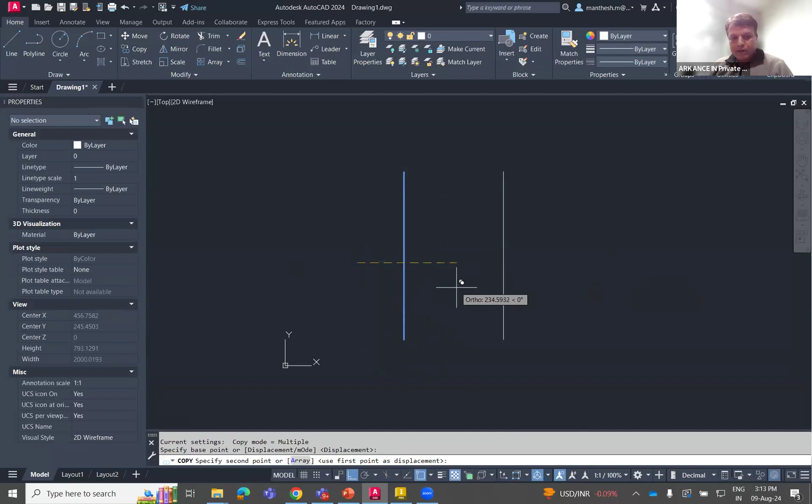I'm going to create some support type of structure. Let me say it as some 400 units. I'm going to copy the same thing for another 200 units. Let's say 150, it's enough.

Circle. And again, one more option. Say size 70. Similarly, I'm going to create a line for another 100 units, at 25 degrees. Similarly, I'm going to mirror it. So this is one of the product supports, whatever you can observe.

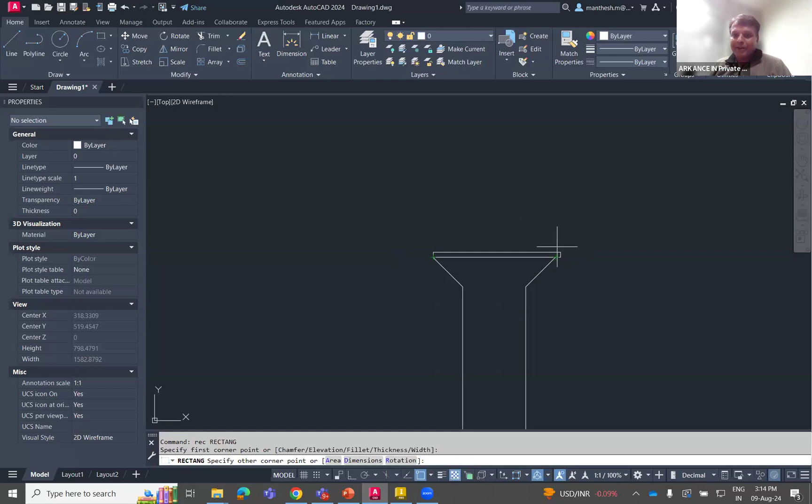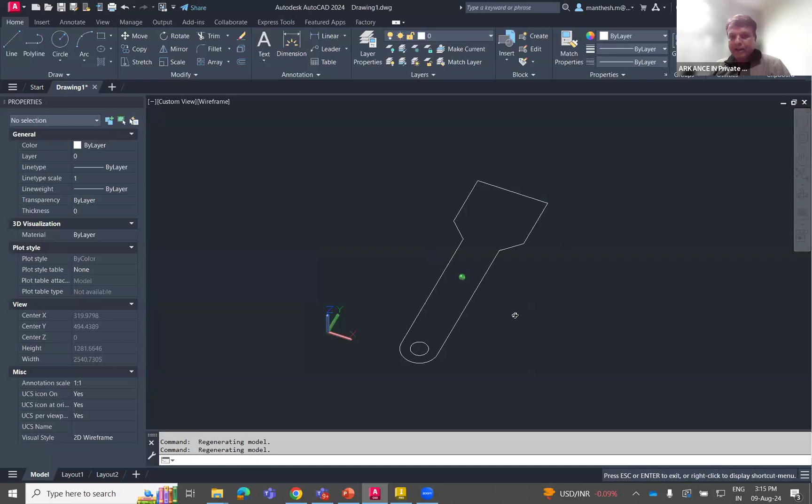I'm going to trim this. Now what happened, so this is actually the base part. Nothing is there in 3D, so I'm just giving a confirmation that we are working completely on the 2D thing. But...

Then again, I have some curved area here. Now this is like a front view. If I take the side view of this, let me create a side view of the component. Maybe I may have a few thicknesses, is it?

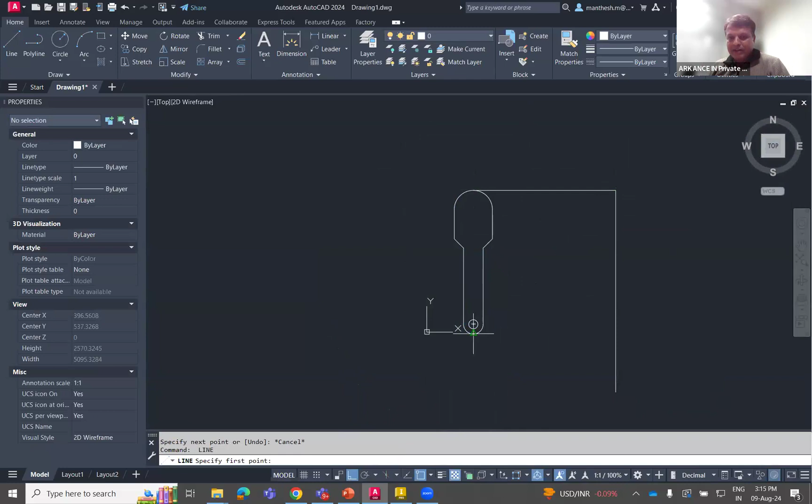Let us take it as thickness of 20 units. Frame. And in between, I have some space of about 150 units. And on top, this is getting interconnected.

So how is it going to interconnect? Probably through a product. You can consider it as some cylindrical type of object. It is getting connected, maybe about 60 units in diameter.

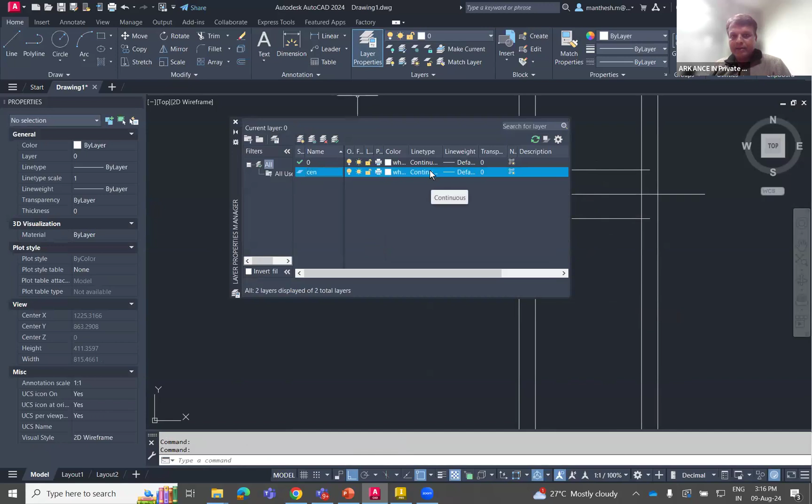And I am going to make this as some center line. Now we don't have layers, so I'm going to create a few layers here. Then set it as center line. Load, okay, some center, okay.

And I'm going to select this. I'm going to create only one layer for this, so I'm going to push this for my center line. And let the color be red. Right, no problem.

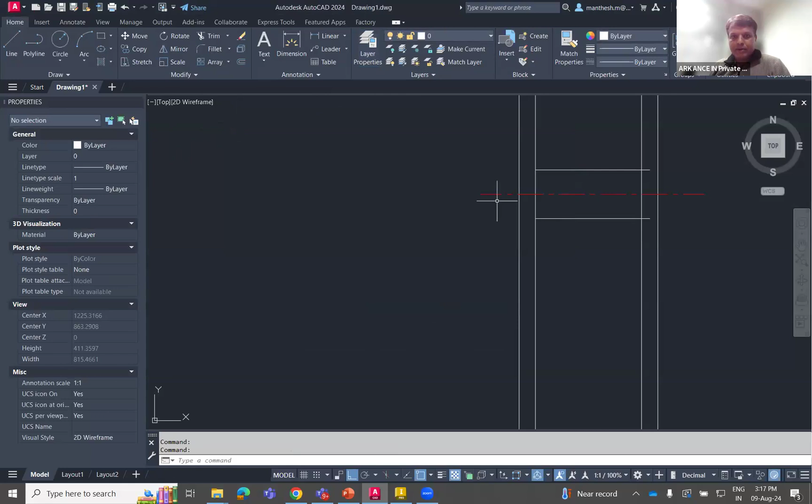But this particular object is in hidden line. Let me move this to one more layer. Let me create it.

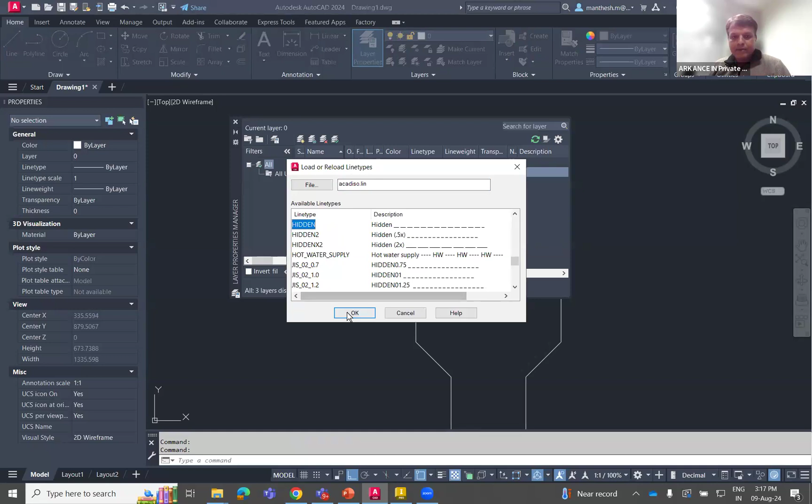If you are using AutoCAD Mechanical, probably you can use all this layering through the AutoCAD Mechanical setting. And let it be in the color yellow. So let me post this for my hidden layer.

Now, the thing is, I want to connect this 2D entity to 3D. I want to connect this 2D entity to 3D. How can we do that?

See, earlier we used to move this to origin. Let me move this to origin so that I want to make sure how a user coordinate system links from 2D to 3D, or from 3D to 3D files, whether it's a STEP, IGS file, whatever the data is flowing, only the origin, if it is a neutral file.

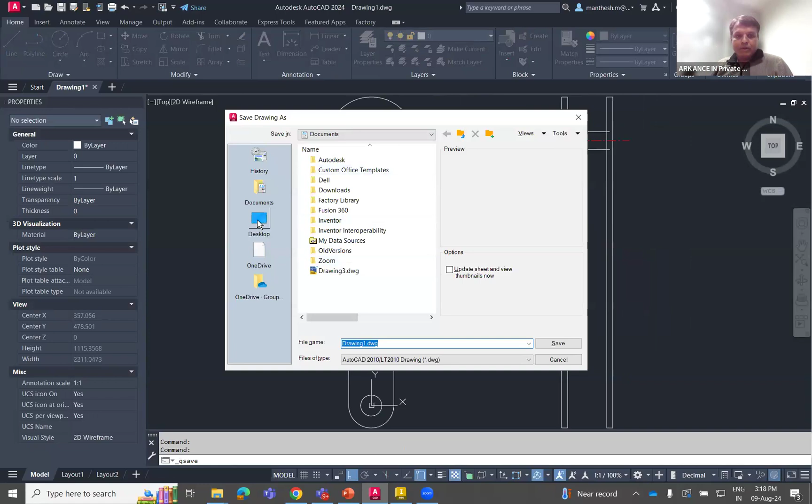I want to save this component. So intentionally, I created already a new folder. Nothing is there in the new folder. I'm going to save it as 2D drawing for 3D modeling. Save. Okay, now I have to convert this to a 3D model.

So let me go to Inventor. And as usual, last time I have not created a project. Probably if you're already using Autodesk Inventor, you'll be knowing how to create a new project. Let me create that new project.

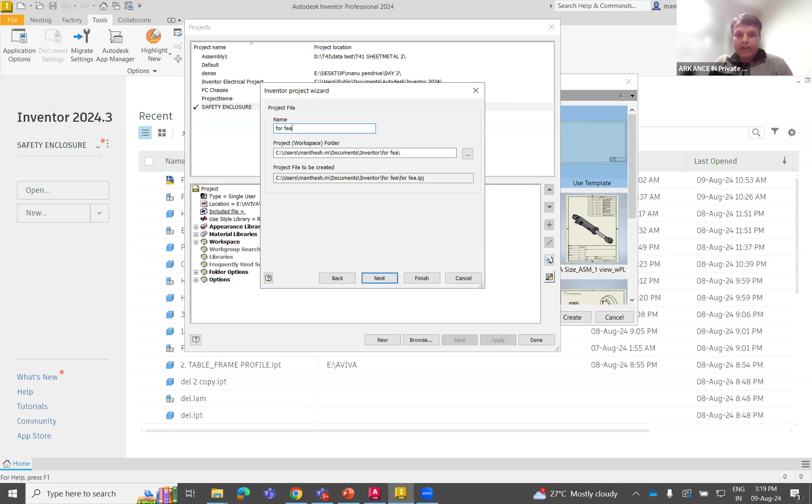Okay, bit off. This is one more challenge if you're using a high resolution system, automatically your screen or the pop-up menus will get enlarged. New single user project, I'm going to say it as FEA. And the project folder location, I'm going to browse the folder named delete. Finish. Done.

Metric, standard IPT. You can see this, I have files like side view and top view. Just going to save this, Control S. For reference now, let me have a few dimensions. So this is about 130.

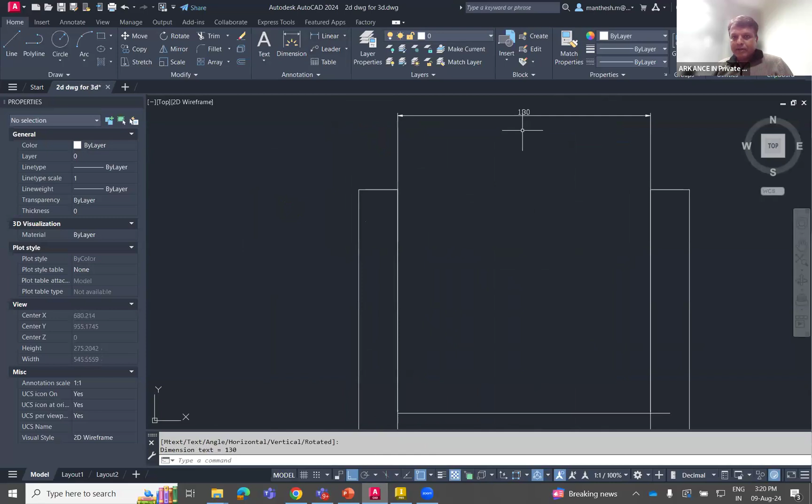Let me close this 2D file. I'm going to use the import command, directly linking through my project folder to the 2D drawing we created. I'll open it and place it on my XY plane.

I'm going to make the origin here. See, I'm selecting the origin here, but in the 2D file, the whole center was the origin. Now if I check my center points, both origins are located together.

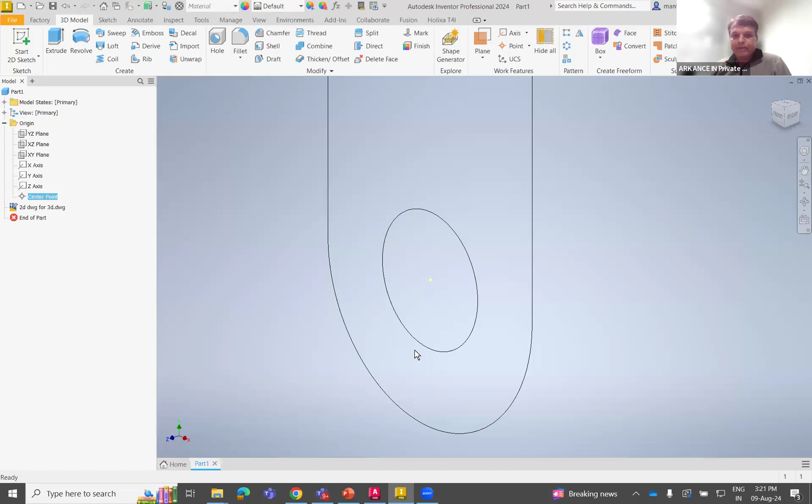So when importing the file, it allows the user to select the origin, because we work with 2D drawings where hidden lines, center lines, everything is visible. It doesn't ask while linking, like using DWG underlay through the import command, whether we can control the layer.

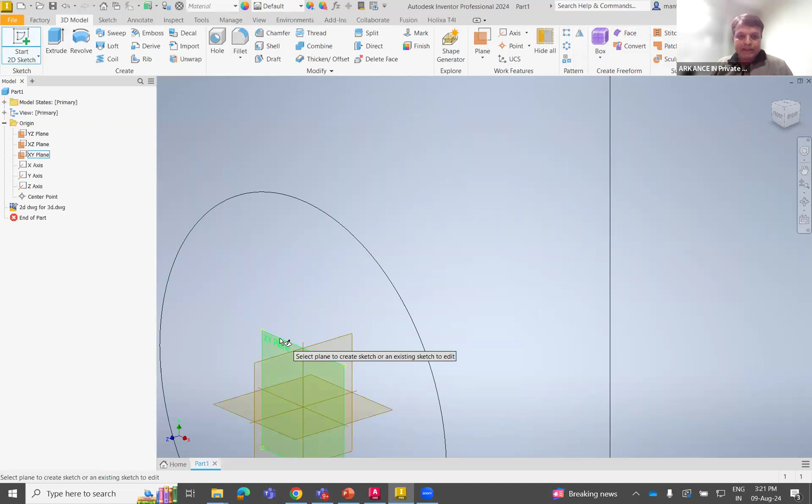Now what happens? Now I want to create it as a 3D model. So I'm going into the sketching environment again. The planes are very small in size, but you can resize them. I'm selecting the plane parallel to my front view, and I'm going to use project DWG geometry.

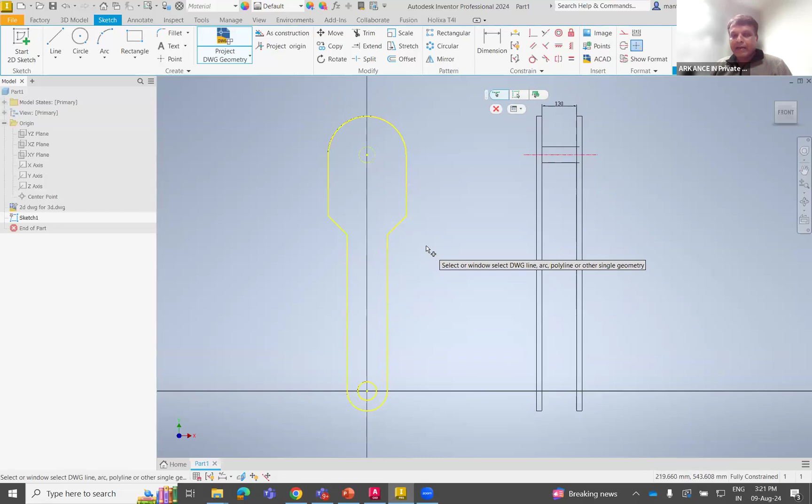Even if you want to avoid this, you can convert the objects. This is interconnection, so now I won't need this profile. Later I can add it, because even if I add this, I can mark it as visible or shared sketch and extrude it.

Let me expand this as well. Right click, finish sketch. I'm going to use the extrude command.

This is on the other part. Let me include it on the plate. Extrude, extrude. And the thickness - let me use measure to check it.

See, I'm not defining anything myself, I'm linking everything from my 2D file. I want the same thing with an offset of 130 mm. Not all CAD can be linked this way, but I can reduce about 40 to 50% of my drafting hours.

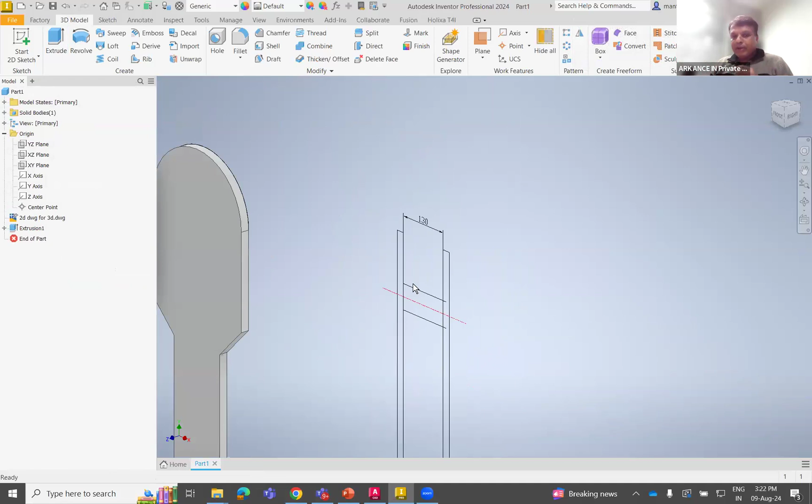Now it's about 130 mm. What is the best way of optimizing my job so that I don't have to recreate everything? 130, okay, I'm going to create a stud for 130. The sketch is there, extrude.

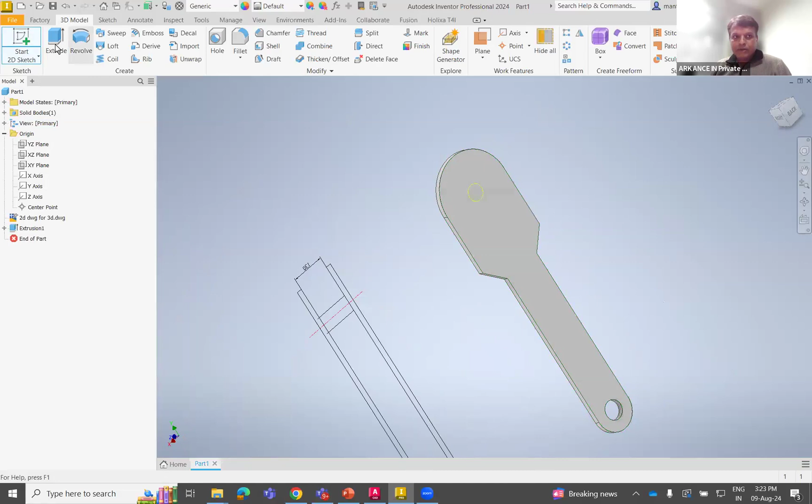It's now asking for the sketch. Start 2D sketch, select it, and I'm going to say project geometry for the same sketch, then finish.

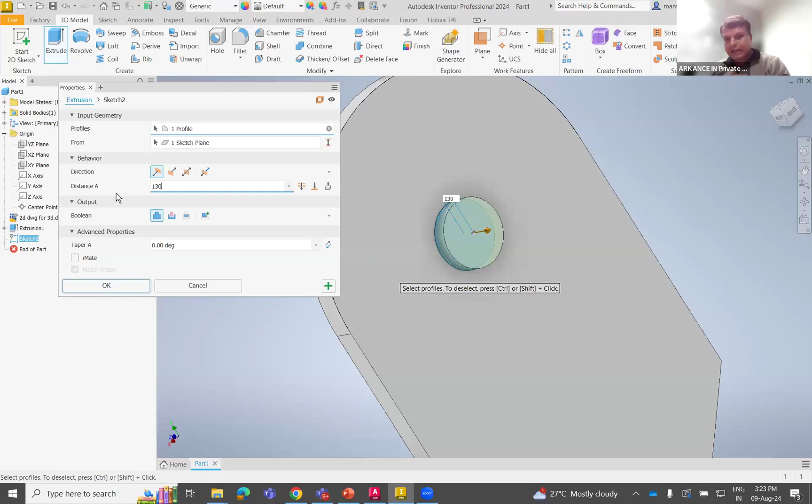So 130 is the unit. Either I can type it or take the reference - earlier we took a reference. Then I'm going with the plane option, mid between two faces.

Then I'm using the mirror command. In the pattern section, you can find the mirror feature - this is it. The mirror plane is the center one. Done, my components are ready now.

Now changes done in the 2D profile will affect my 3D model. Let me hide this work plane now.

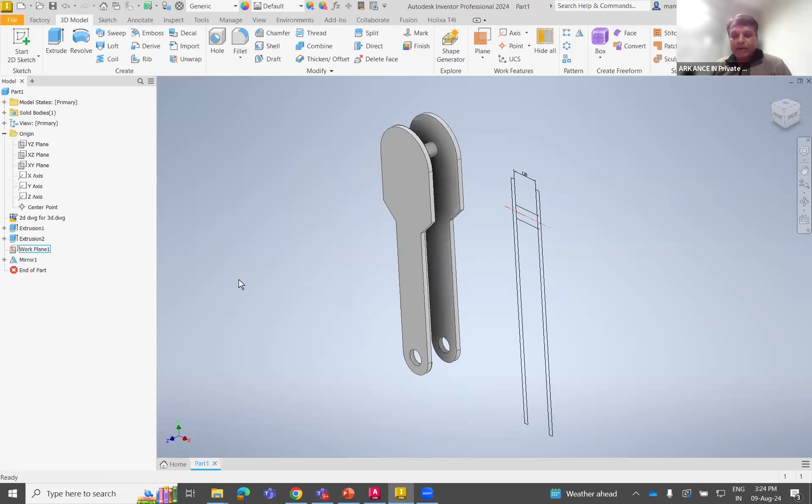Visibility unchecked. To do an FEA, we obviously need the material properties. I still haven't assigned the material properties. Let me take the material as mild steel.

Oh, I missed it. Mild steel - now we have assigned the material property. Let me save this part.

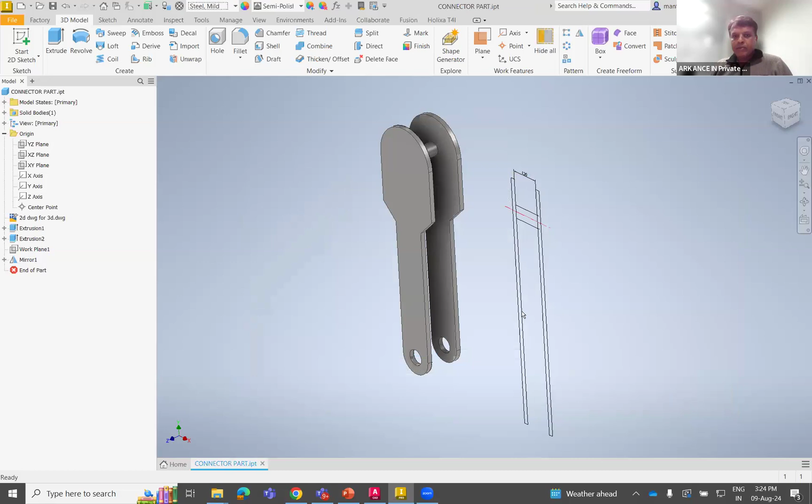I'm going to name it as connector part. Most of the time these things are in a bigger size, available in the railway engine. Sometimes it even looks like a small version of your vehicle chain, but I've taken it in a large format.

Now, changes done in AutoCAD - let me show you. Let us go to AutoCAD and do some changes now.

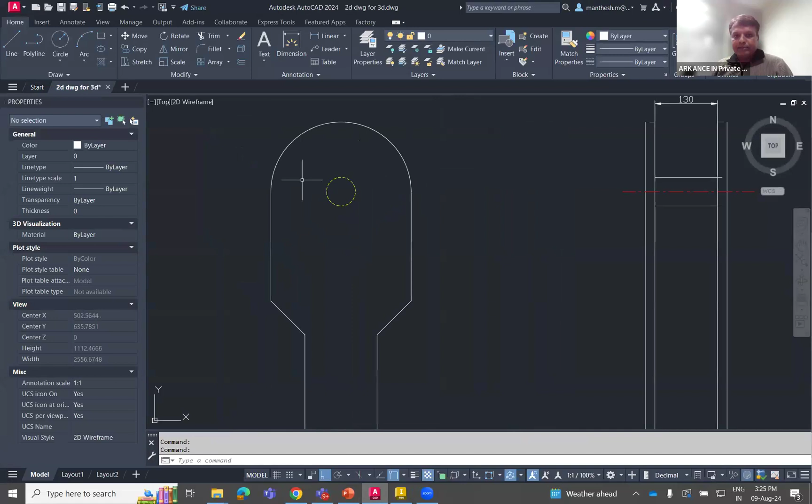I'm going to increase this. Right now the measurement is something like 60. If I change this to 80, I'm going to get it here.

And I'm going to use some fillet with 10 radius. F enter, R 10 is the radius. Already tested, very small in size.

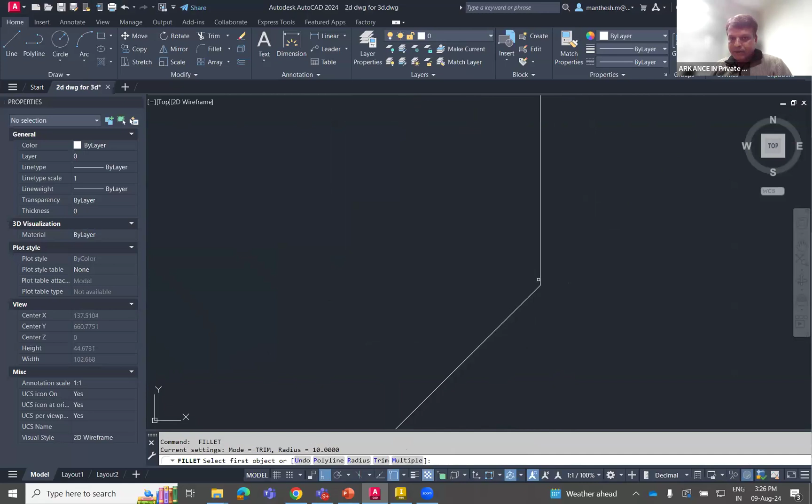Let us avoid the sharp corners so that we can get very good FEA results.

Now we have changed it to dia 80, or something like a cutout that you need to add - you can add it, whatever you save in AutoCAD. With Inventor now, it needs an update.

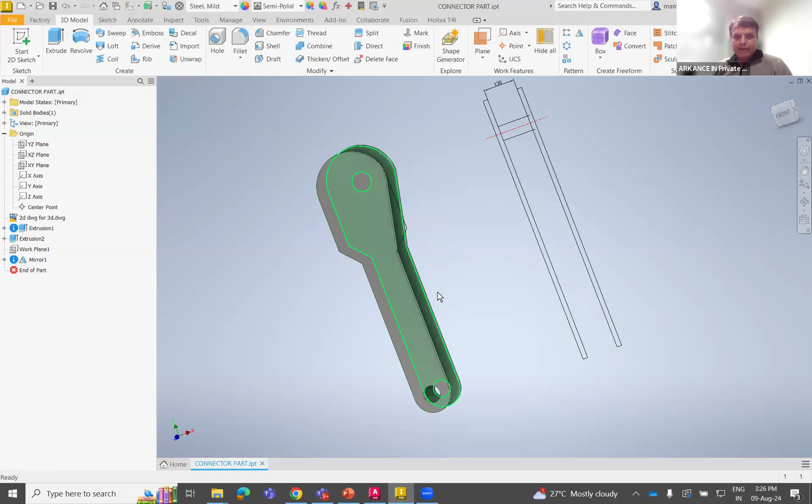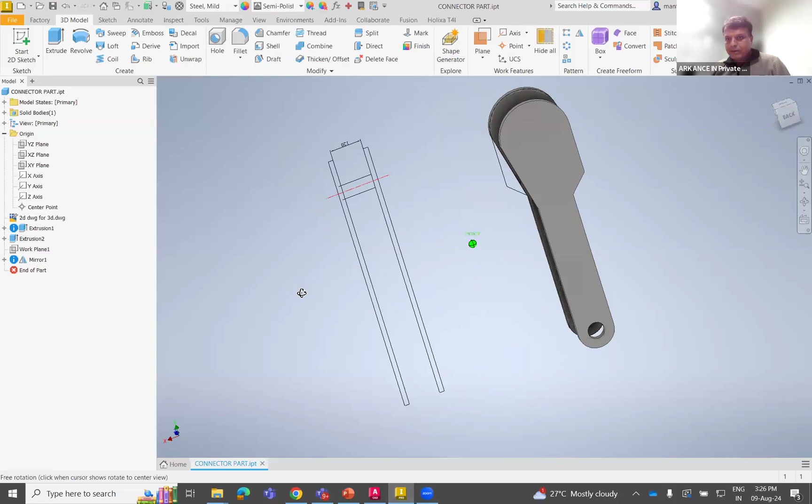Accept it - sorry, some problem. Let me close. It's showing as write protected because I launched in both software programs. I don't know what the problem was, let me recheck.

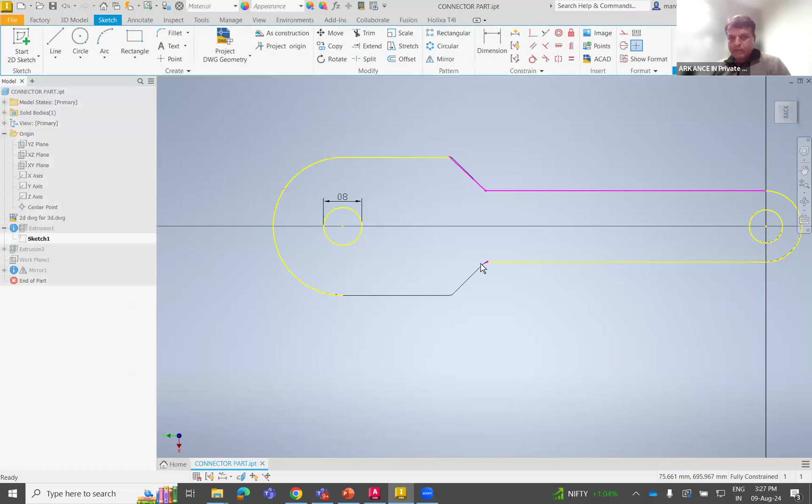Problem in the project geometry option. Project DWG geometry. Ensure that when you're projecting any object from AutoCAD, it has to be a polyline, or else you can use certain commands like boundary and pull the data. Finish.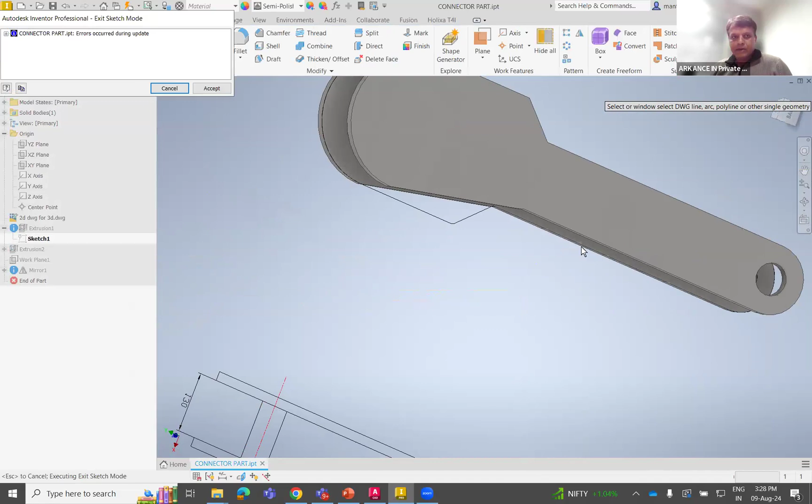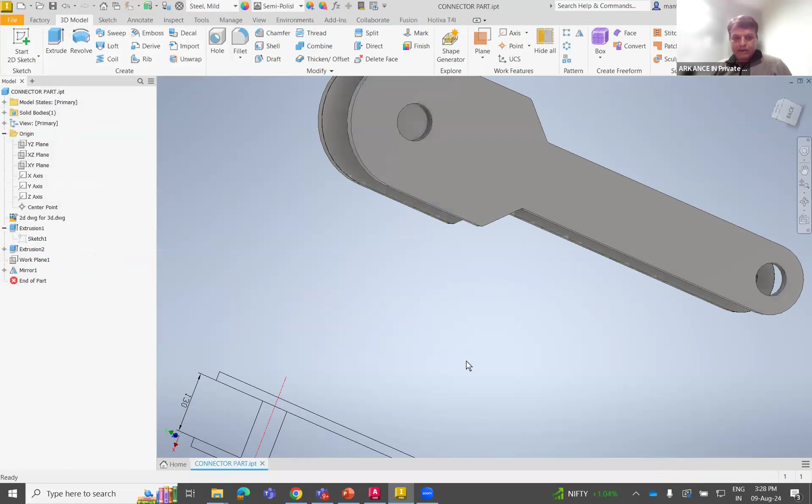Seriously, give me a minute. Let me cross verify this. Accept. Edit feature. Okay. Now everything is okay. Save it.

So my product is ready and it is communicating with the 2D. Whenever you cut some line and close a boundary, you make it an open boundary. But how to avoid this mistake is, this is like single entities, is it? You can use the polyline edit command, select multiple, join all of them, turn it into one. Now whenever it is a continuous line, you won't get an error anymore.

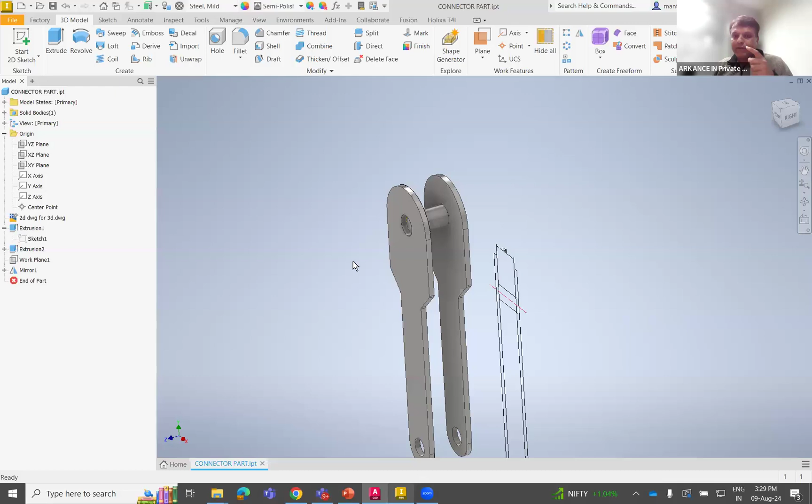Whenever you have an open loop, while using fillet and other things, it will become an open loop. Then the associativity will be lost because Inventor needs a closed profile to extrude. Am I clear?

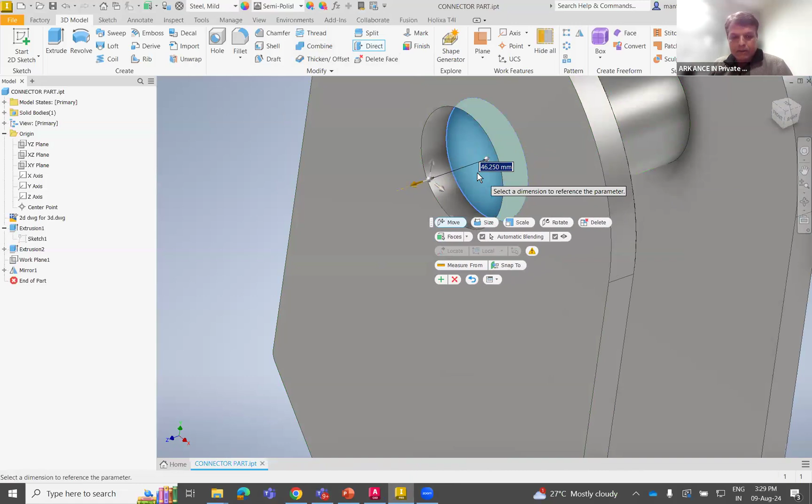Now, before getting into FEA, I have to close these gaps. I can use direct edit, 20, or else I can go to extrude. Again, I can maintain the associativity by saying project geometry, finish.

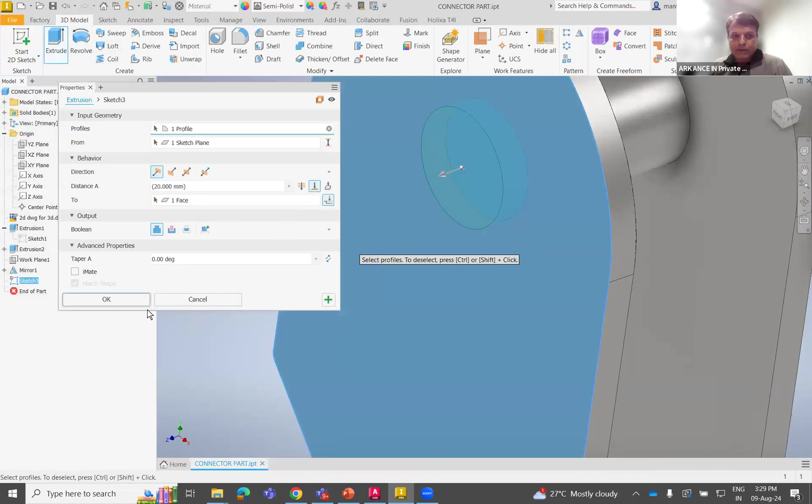To this face. Okay, same here. Extrude. Start 2D sketch, let's say, then project geometry. Finish. Extrude till this face.

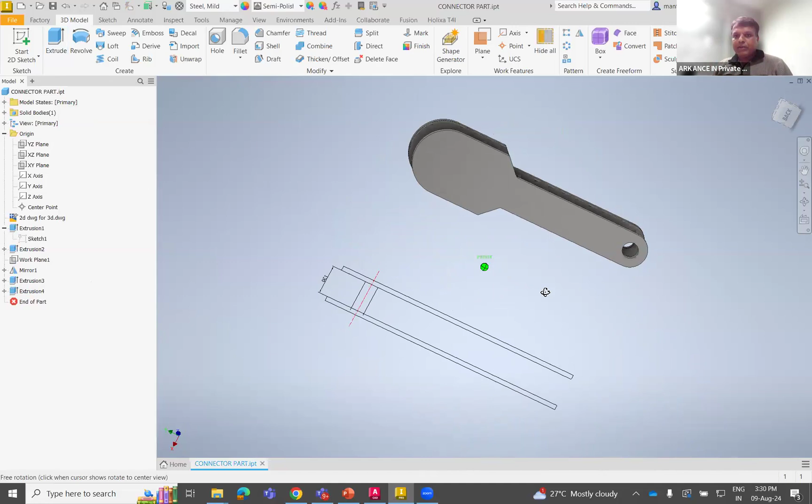Now what next? See, why do we do an FEA? To optimize our model, is it? Now I'm not good at recreating the shapes and other things, but I want to save my time. At that time, in Inventor, we have an option to do optimization. But for that, you need to know all the loads and conditions. That is the major thing.

How to do an optimization? Before getting into FEA, how to optimize this model? Just go to shape generator. This is available with your Autodesk Inventor Professional, and here also the core solver is Nastran. Now, the material property is already assigned in the 3D model.

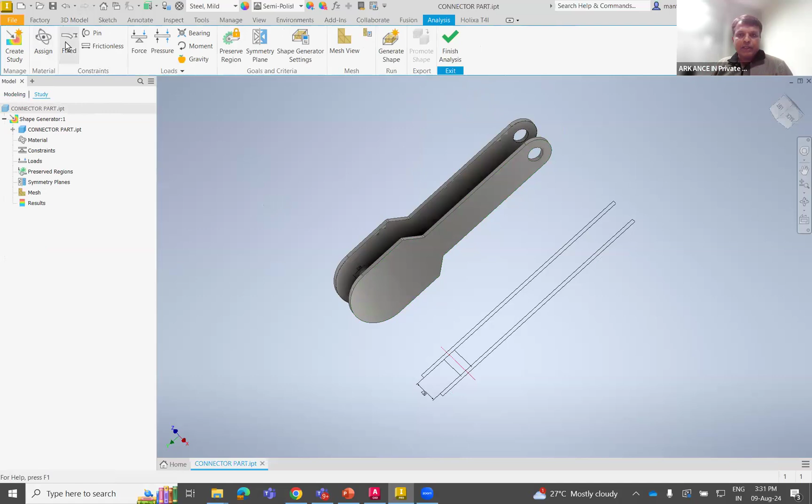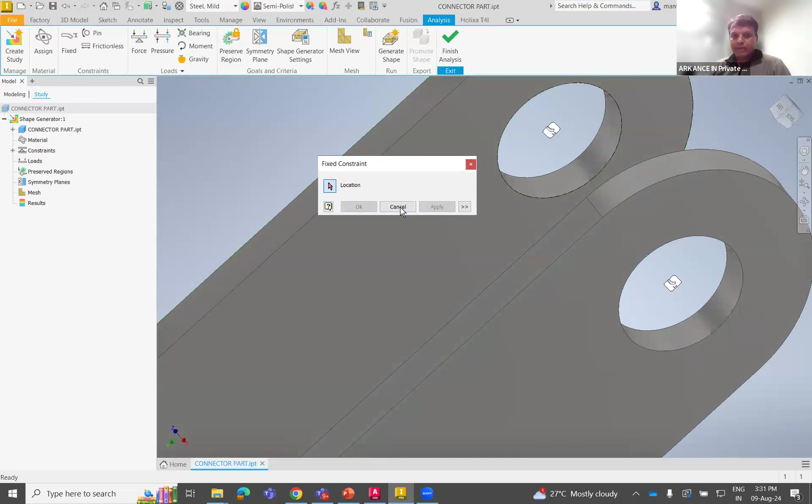I want to have constraints in this. I'm using fixed constraints. Where do I want to fix this? Somewhere here and here, apply it. See, this area is fixed.

Okay, then I'm going to get some force somewhere on this and this, and it's equally distributed on both faces. I'm going to take it as some 800 newtons. Apply it, cancel. Then always ensure that if you want to define gravity, define the gravity.

Gravity is in this bottom direction. Okay, I'm going to say gravity, and let me define the gravity by using the modeling area, then the Z direction, okay.

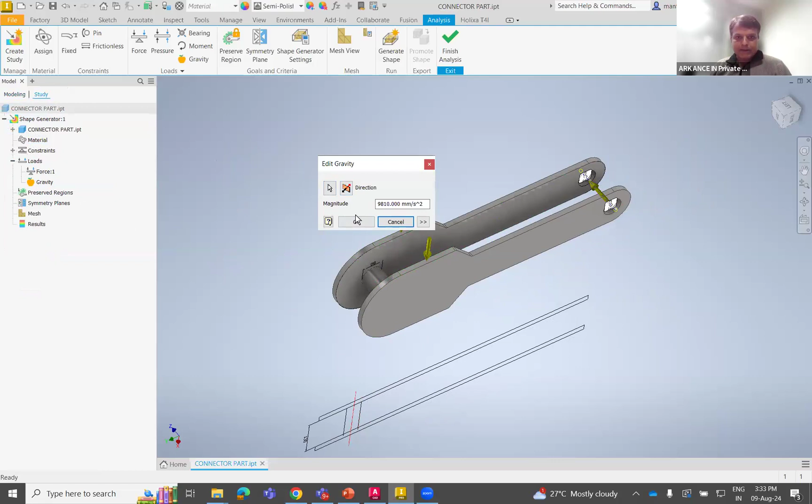Check. Edit gravity, it's not Z, it's on the X direction. Or else I can delete that and let me recreate it. Gravity anywhere, X direction. Okay.

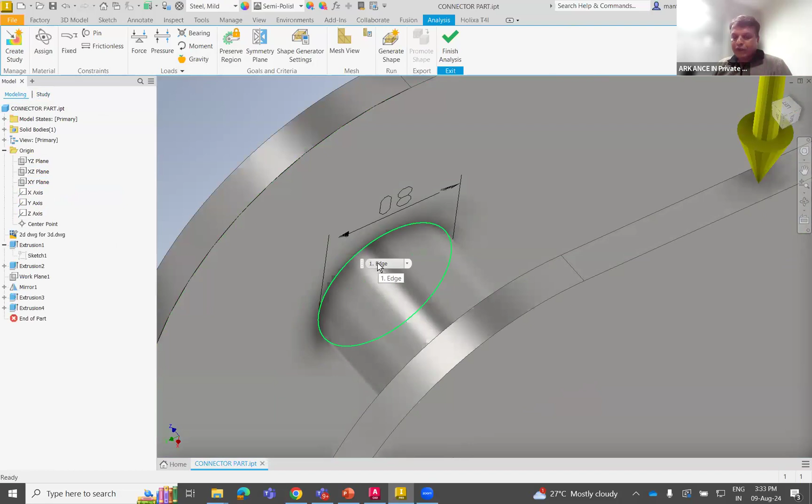Now it is okay, so that the material or load flow from element to element will be uniform. And we always know, if I want to have a weld, I can enter into the Inventor welds environment and create a weld so that you get very actual results. But everything is already bonded.

Now I have defined my material, then constraints and the load. What is next is mesh. I'm going to say mesh so the elements can be divided, and I will tell the software this is the loads and this is my conceptual or final shape, but still I want to optimize my design. Pick the Shape Generator Settings and okay.

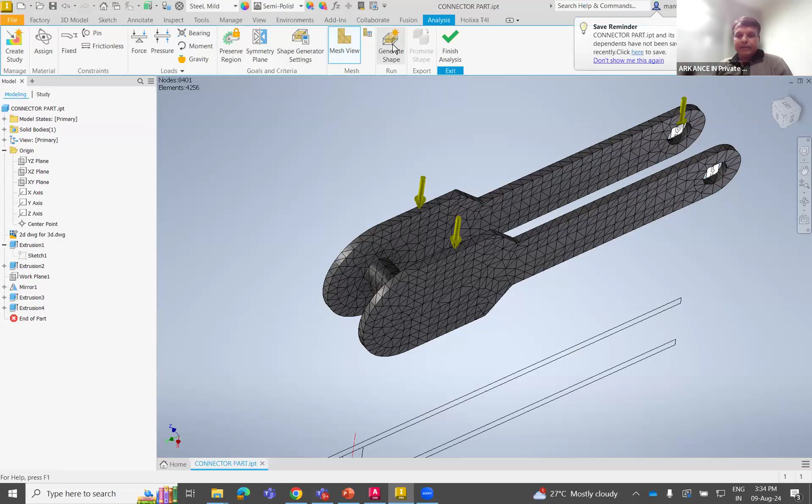Generate shape, run. Now in this, if you have missed anything, according to the procedure or protocol of what the simulation needs, if you're missing a bit of something, it will show as an error, so you need to overcome that and fill it.

It's not only on the part model, even if you have an assembly, integrate that, pull it into a new part file and import it as one component. Then you can execute this.

But if you have an assembly, shape generator is optimized only for shapes, not for the complete assembly. If you have a complete assembly, pull that model as an individual shape, generate the shape, then assemble it, then bring it into the FEA. So this works on the part level.

If you want to do something on the assembly, there is an alternate way. You can pull that assembly as a part by using the derive command of your part model, and make it a part and execute it. But still after doing that, you need to execute that part using FEA. You need to cross verify that part. Still this is working, and even in shape generator, the engine behind the simulation is Nastran.

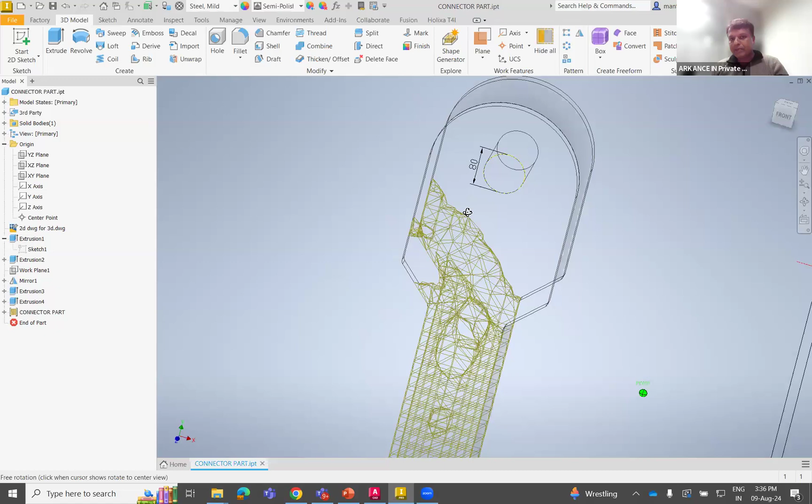Showing that, see, loads are here. So this is one of the shapes I can promote. If the load is here, we are over-designing the product. At this time, which elements I want to retain is based on these loads. These are the elements. What I can do is retain this shape, but remodify my model.

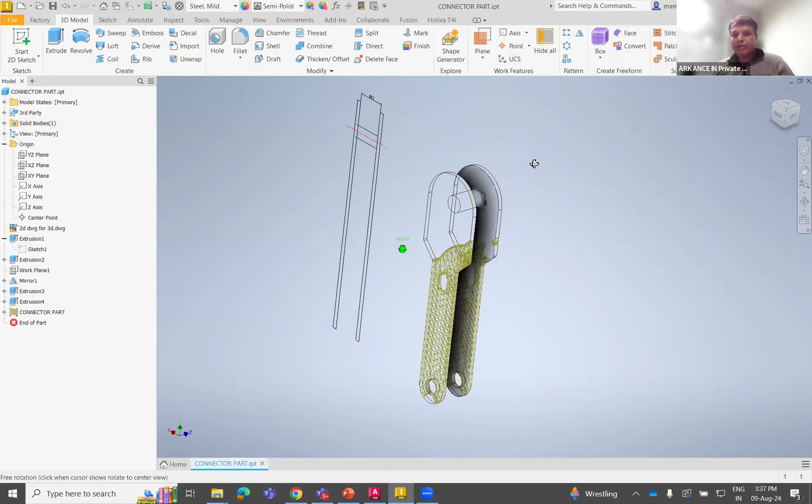Let us check the load criteria and redefine this. What happens if I give the loads from the top area? Let me go to shape generator. Study is there. Let me delete this force and the gravity, then reassign the loads. Direction is this direction, about 800 newtons. Apply it, cancel. Now generate the shapes.

Based upon your processor speed and the RAM, the results will come. Sometimes if you have a very large part, it may take about 2 to 3 minutes. Processing.

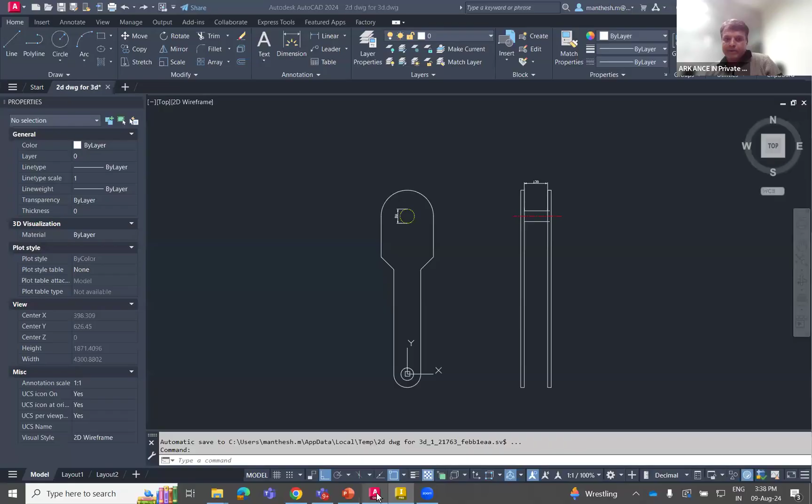Okay, probably I will forget every time — no, we need to close this file, but I will keep it open. That may cause some errors. See, it is asking for some auto update. Let it be. Let me get some results in shape generator.

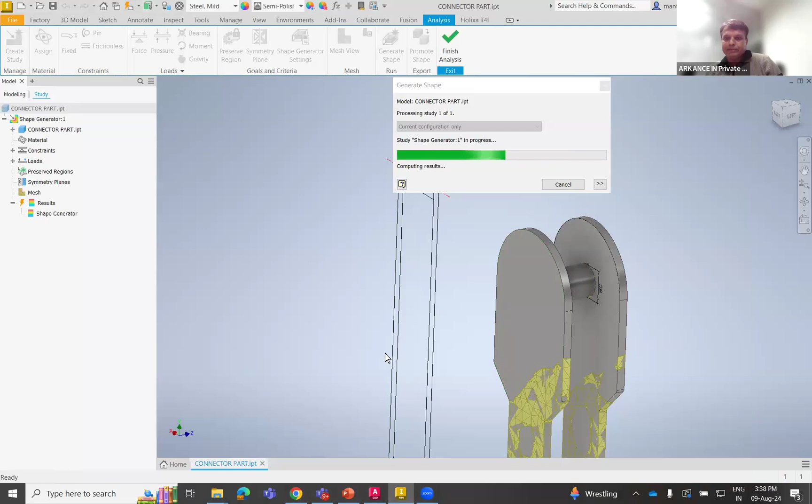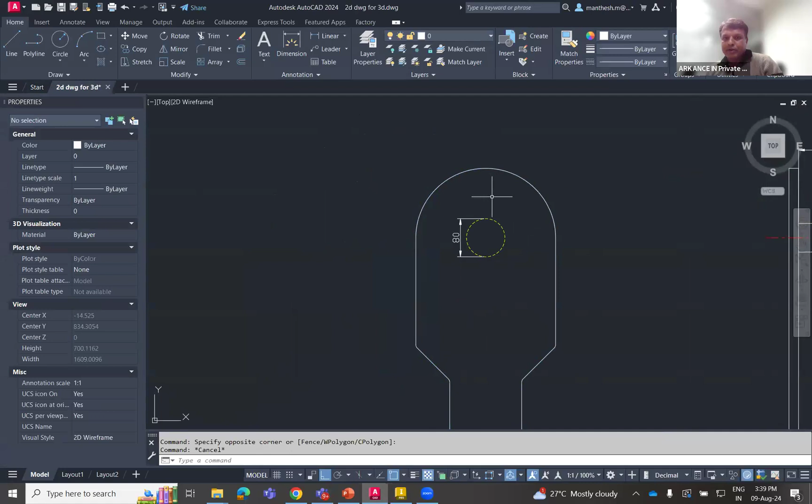See, only this area needed material, but we have created more material outside. What I can do is optimize this design. Anyway, I can reduce the sizes here because we are applying the load here. Just I can come back to my 2D sketch and reduce this shape instead of having some diameter and other things. I can reduce this because my part is over-designed.

Anytime you want to change the radius, you can change the radius. Anyway, I need that for some extra production. You can save it, come back, update it. Again, problem with extrude. Sorry, again my mistake. Probably we have a small fillet there — I want to delete that. No problem, let it be.

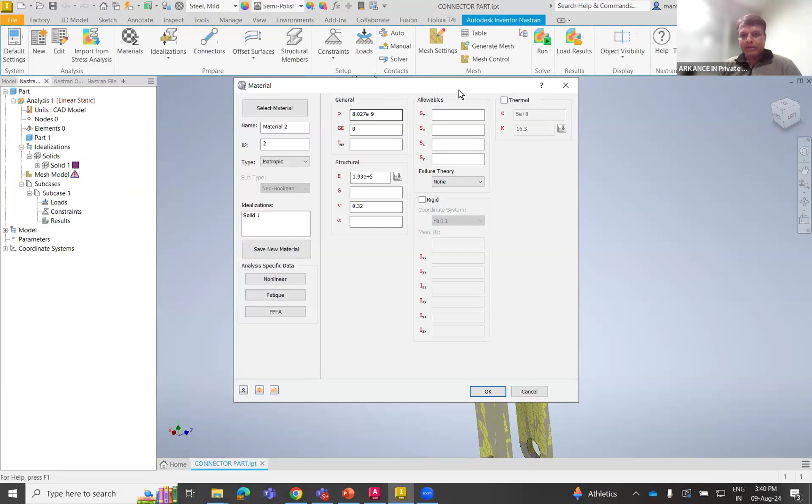Now, with the same drawing, I want to check with my FEA simulation. What I can do is pick on environment, Inventor Nastran. Material is already defined in the part model, so whatever you have defined there, the same material is followed in your FEA simulation for Nastran, either for your shape generator. Let me show you by picking this — what material we applied? Mild steel. See, the structural thing, general purpose, and idealization of the material will retain from the part.

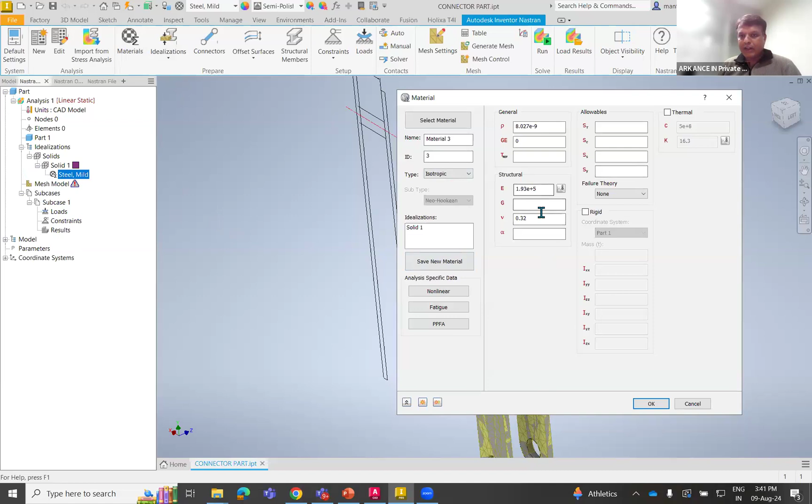See, steel mild. If you want to check the properties, you can pick on material and check the property — anything you want to change, you can change it. This is the first thing. Or if you have not applied any material, you can pick on idealization, select material, then change or adopt a new material, either from the Autodesk material library, if you are crossing data from Revit and other things, or if you have already created some custom material in Inventor, you can select it from here.

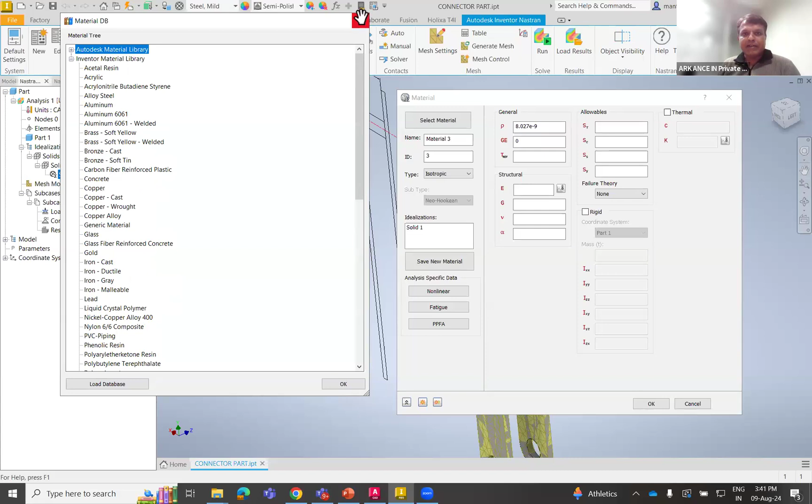Now, next is idealization. Why do we use this idealization? For components where we now use L angle, I sections — after using these L angle and I section shapes, we want to simulate whether it should work like a structural shape. Whenever it's a structure shape, the skeleton model comes into picture.

Now to convert them as solids. So this is one idealization, one area where you can convert from structures to finite elements. Or else you want to do a structure simulation, you can change the study type.

How to change that? Now I'm using linear static stress analysis. Pick on here, then edit, then linear static. See, I can use my normal modes or impact.

So we can do about 16 different types of FEA with Inventor Nastran. So I can change my study type, then options. Whenever I select it as a bonded connection, it will be a weld connection. Change it. Then the same way idealization is done with connectors.

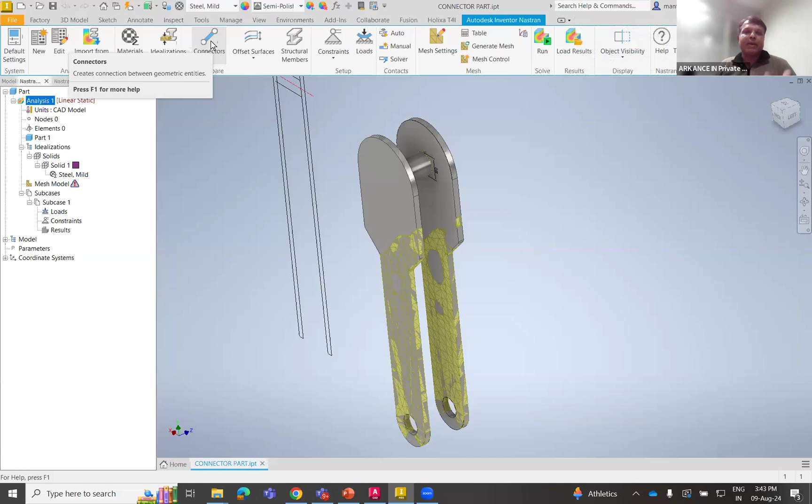At that time I can have those connectors here. Connectors in the sense means you can have any types of nuts, bolts, fasteners, cable, spring, or bolted connections. These types of connectors you can add.

It's a rod connection, cable, or spring type, rigid body, or a bolt. Rigid body means no gap, no suppression, no movement. So that is what rigid body is.

Structural members, see, if it is a beam, I can convert it as a solid. Even you can do that in idealization, or else some structural members you can convert directly to solids.

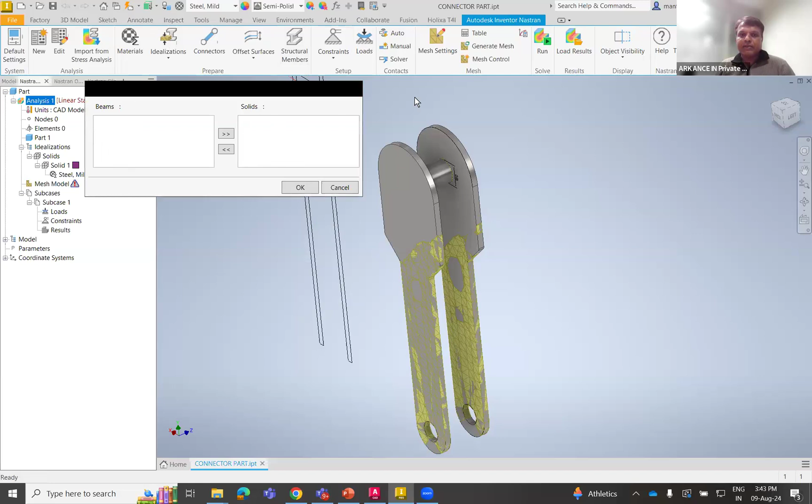Next comes constraints. I want to use fixed constraints, in all directions. Let me apply on this curved surface, and sizes, density. So this is the constraints I'm going to have.

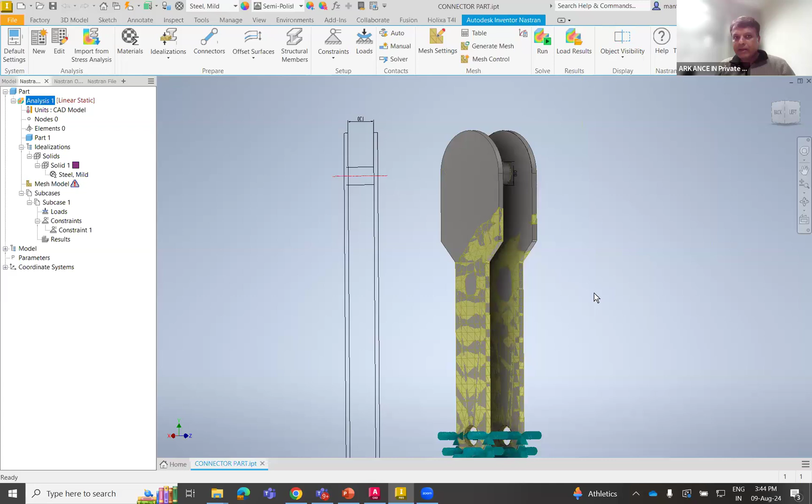Next is load, in minus x-axis. This is x minus 800 newtons. So where I want to apply on this face, then we use the sizes like more, and density a bit less.

I want to redefine the load. Edit. Sorry, it's on minus y.

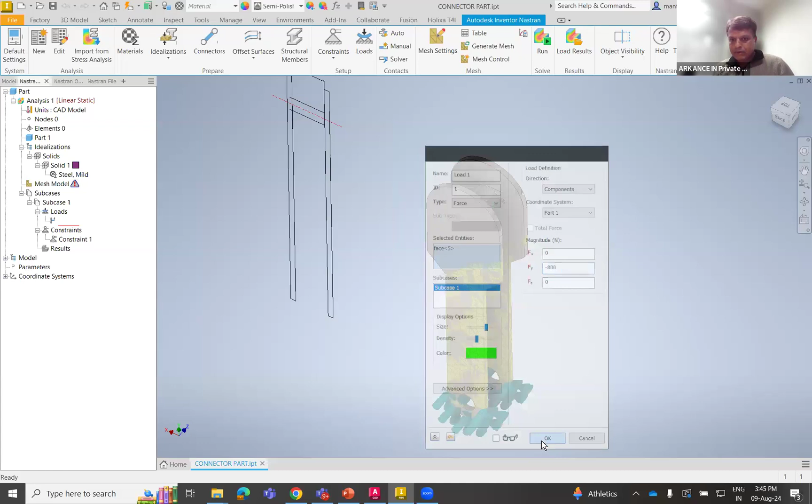Now what next? Contact, single part. Probably I can use automatic contact. Anyway, in the study type, I have defined it as a bonded connection. So generate mesh.

Good, then run simulation. Probably my product is over-designed. Now let us check.

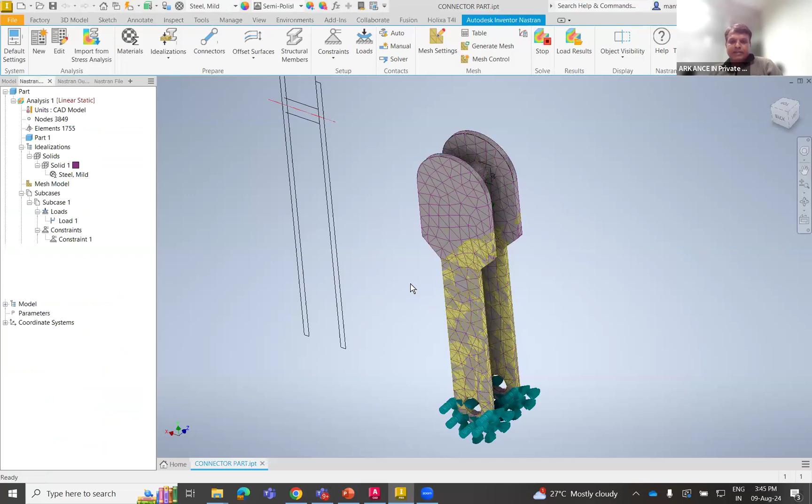Deflection is 0.3, not even visible to an eyesight. But as a software, it indicates more.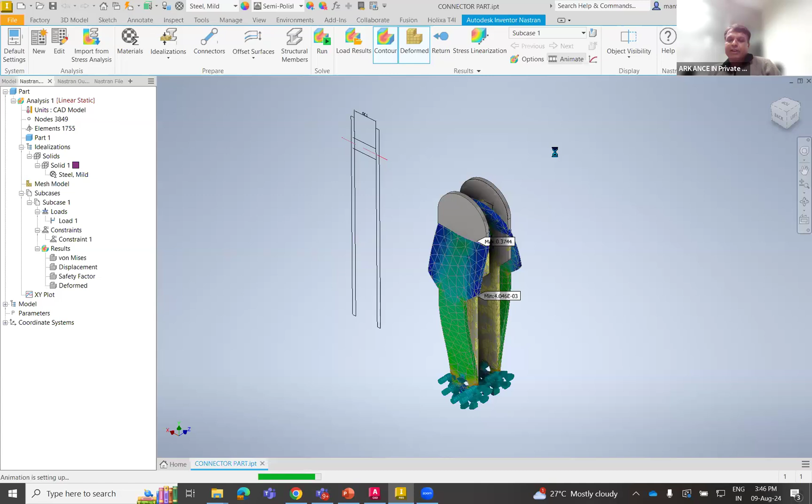Now let us check animate. Like 0.3 is not visible to a human eye when you apply that much load, but it shows the deflection. And I am going to highlight, whenever it's a red color, it doesn't mean you have more.

Now stop the animation and we can check the displacement here. The results are there. Maximum is somewhere at the peak.

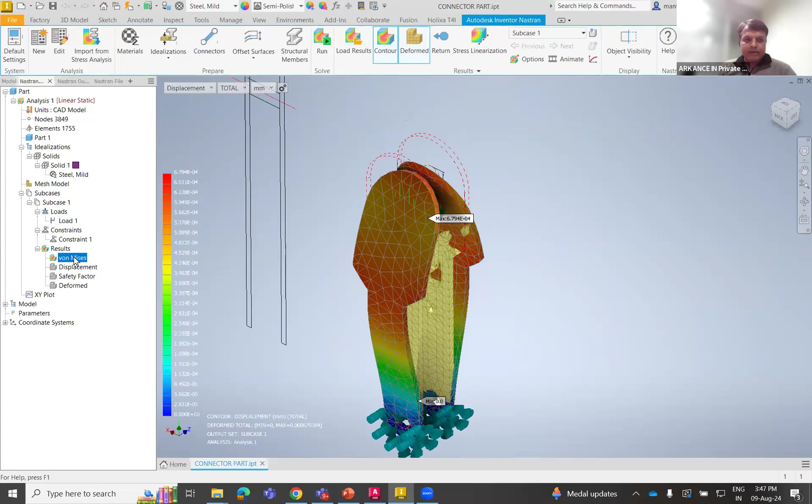And I want to check my von Mises stresses. So 0.374 is the von Mises stress, that too in the center, exactly where we check. Even if the stress level of the red highlighted area is not crossing 50% of the thickness, then it's only at the peak, we can ignore the stress by considering it as peak stress.

Peak stresses, we get it somewhere in the sharp area or very cylindrical face, on the top face of the cylinder, like this, you will get it. But the stress value is very less. So it means that I can go ahead with still more optimization.

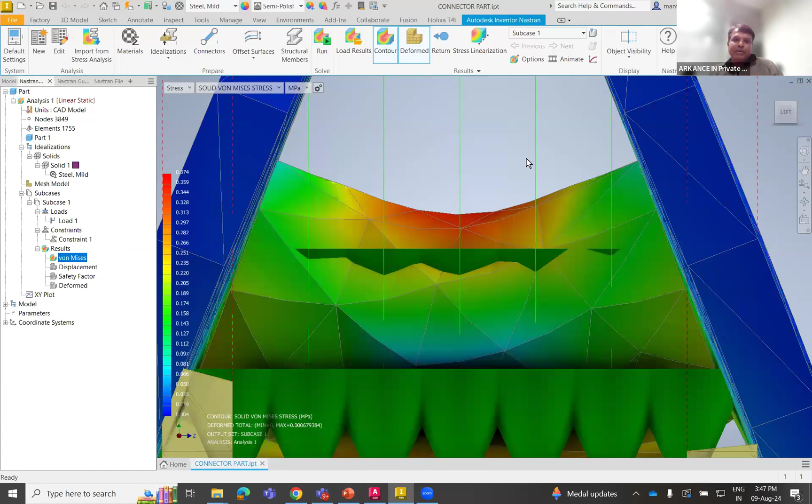But as per the shape generator advised, if you are applying some loads, I can have a very straight line. So this was the generative design shape it has given. See, that I can still optimize my model, and even I won't need anything on the top area.

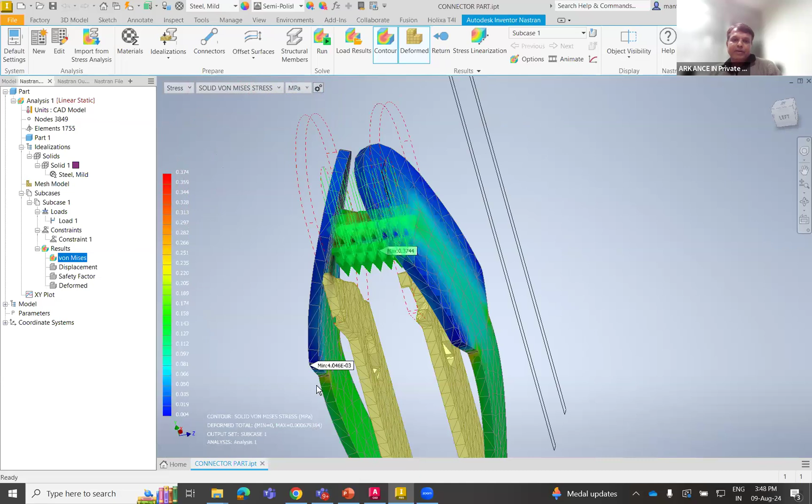So I can apply about 150 to 160 times more loads. 150, 160 into 800 I can apply to withstand my loads. This is how safety factor is determined on this particular design.

Don't get confused between safety factor and factor of safety. I've seen many engineers get confused. Safety factor is the result thrown out from your FEA. Factor of safety, while applying the loads, by taking the standards, we apply a factor of safety. Safety factor tells how much load it can withstand.

Whenever we are taking something on board with aviation technology, we consider the safety factor as 1.2 because everything is on the fly. Now for off board applications, we consider the safety factor as 3 units. If you have designed for 100 kg, you need to apply the load for 100 kg, then the product has to be designed for 300 kg if it is off board. Whenever it's on board, it must be 1.2. So these are the things you will get in the standards which you follow.

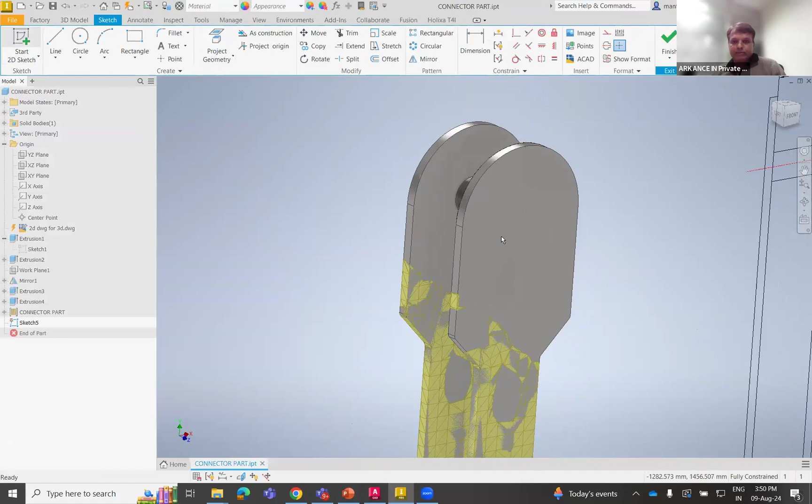Let me have some material removed here, then finish, extrude, cut through all. Still, why wasn't it giving a problem this morning?

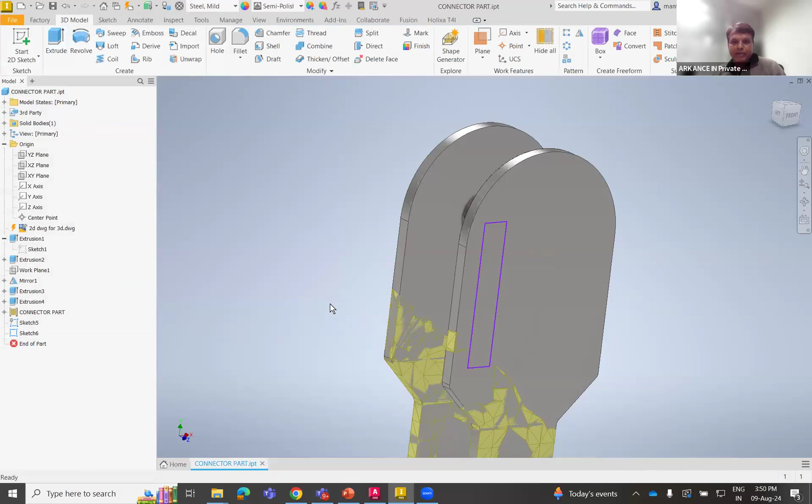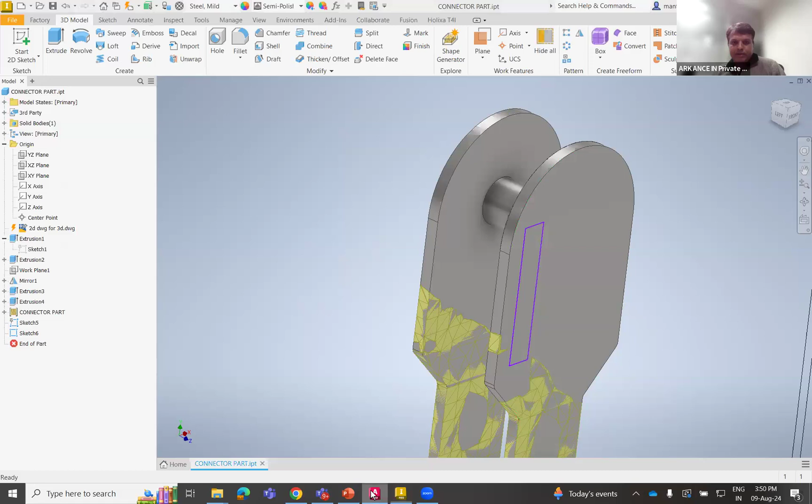Some problem in this. Okay, let us update this and go back to extrusion one. I don't know why it's even not there in 2D. It's giving some error. Just try with this.

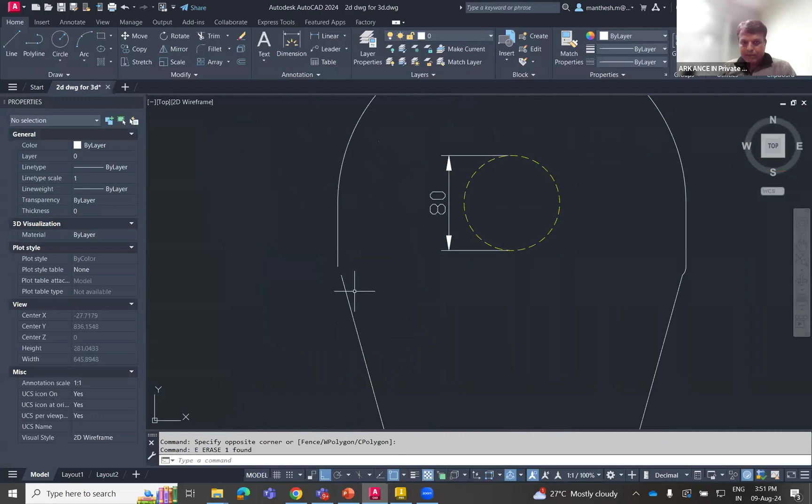Changes done from AutoCAD will reflect here. I don't know why my thing is giving a problem. Yeah, probably of these guys. Let me join this as well as this guy. No, I think this will be okay.

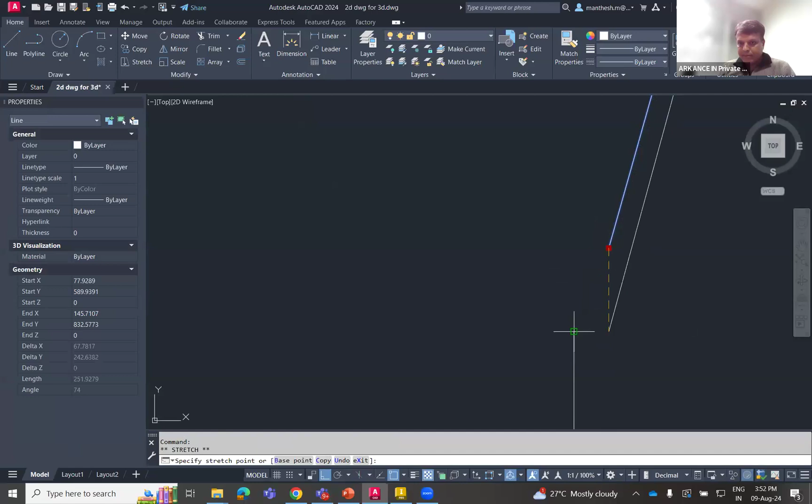This is one thing I usually forget, like save the drawing, update it, accept. See, fillets will always cause problems. That's why we always do post-processing. Small fillets, sharp corners, just remove them.

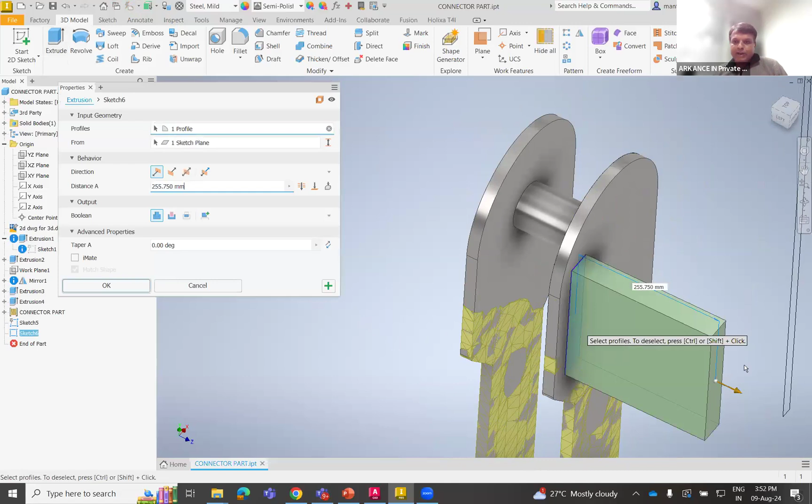And I can use some default planes. Visible, mirror the slot, mirror plane is this. Still, again, you can subject this model for an FEA and observe the results. Then again, further, you can optimize the model.

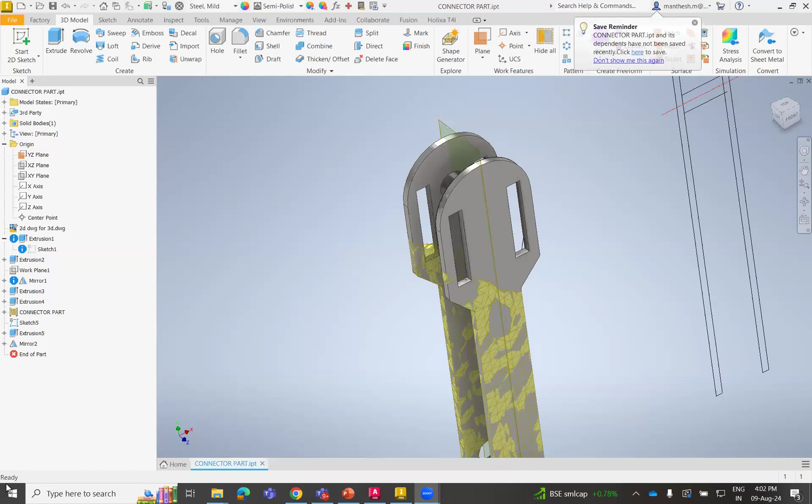Let's take the ASME standard. In terms of mechanical, if something is off-board, the factor of safety they always consider is 2, whenever it's a consumer product. Now if we are working on a defense product, they'll consider the factor of safety as 3. Like if 100 kg has to be withstood, we need to deliver the product according to ANSI standard - it should withstand more than 300 kgs.

So codes and standards are entirely different - we follow standards for product design. Like Robot Structural Analysis we have, which is equivalent to your STAAD Pro - at that time we follow codes because every code is inbuilt in the software, and there I'm able to apply the codes.

For steels, yes, you can apply the codes for steel structures. That's not a problem. Whatever steel structure shapes you are selecting in Inventor, it will automatically take those codes.

Mr. Braja Gopal has raised his hand for a long time, so he is allowed to talk if there is any issue. Goswami, you can speak, Goswami.